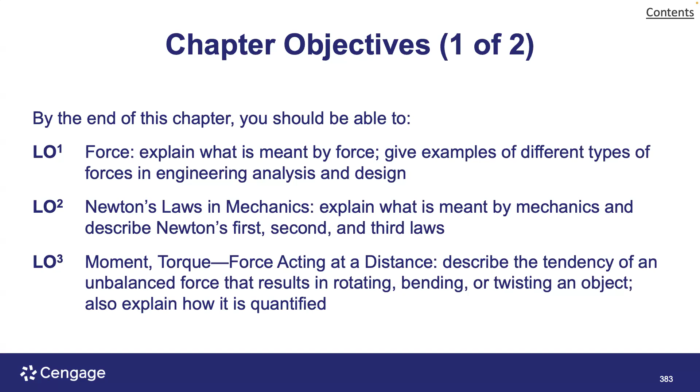Once again, here we see this term again - force acting over a distance. This is in terms of work. For some of you that have a long drive, you could say force over distance - you have to drive 50 miles, that's a lot of force that has to take place. For most of you it's probably using gasoline; some of you it might be an EV car, so it's electrical energy, kilowatt hours that are stored and converted into force, acting over a certain distance, maintaining whatever it's needed to go that distance. Starting from zero to get an object moving is going to take more force.

So this describes the tendency of an unbalanced force that results in moving an object through a distance, and it also explains how it is calculated.

When we have pressure and stress, that's force acting over an area - you can think of a balloon, a blow-up balloon. One of two things is going to happen: if it's made out of rubber, it's going to get bigger the more you blow air into it. But if it was somehow constrained, the pressure would build up in that fixed area and get higher and higher. Your tires on your car, you get them up to so many PSI - that's an example of pressure.

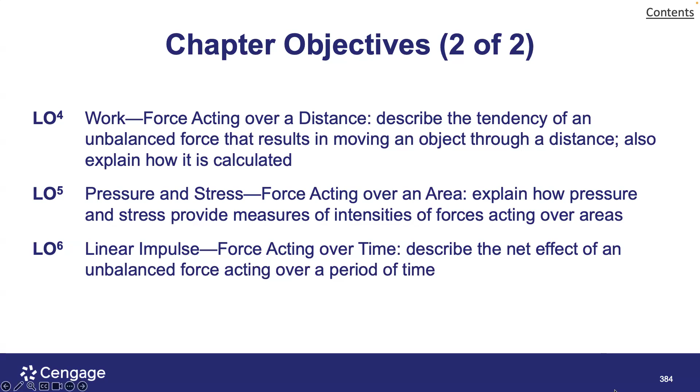Maybe you've seen handbells - I'll just think of a musical example. They ring a bell, and based on the acoustics and the way it's set up, it's going to resonate for a while and you get that sound going over time, responding as it's vibrating. That vibration slowly goes less and less, but those are tuned just like a tuning fork - you ping it on the table and it's going to sound a note, and it just gets fainter and fainter over time. Or you can have an impulse response from a couple other sources, but that's just to give you a general sense of what that is.

So the simplest form of force that represents the interaction of two objects is a push or a pull. If you've ever played tug of war, you could be thinking of that - whatever team has the stronger folks is likely going to get the other folks to go in their direction.

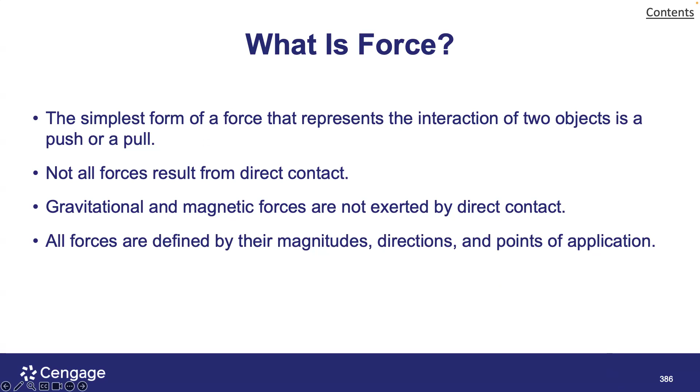So there's a variety of different forces - there's gravitational force, magnetic forces. Those are all things that are there as well, so we get a chance to think about those here. We talked about units of force, SI units, previously, so I won't get into that.

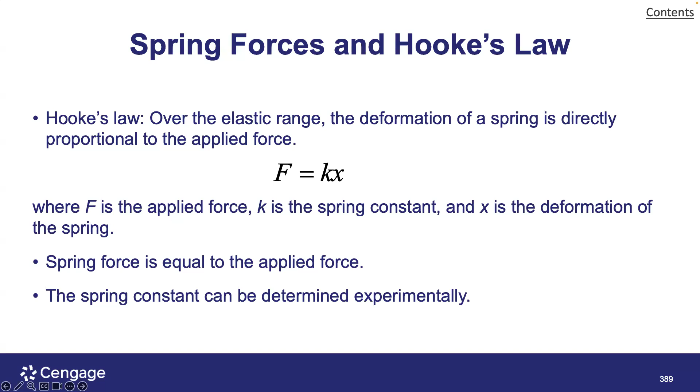You have spring forces - you can put pressure on a spring and then release it, and that force is going to go out. So this is an equation for that. If you have a garage door opener - my wife and I, our garage door has these great big springs that keep the garage door open - that gives you an idea of the kind of force it can manage to keep the garage door open and then have it nicely close without too violently going down when you want it.

So then we have Newton's laws of mechanics. Mechanics deals with the study of behavior of objects or structural members when subjected to forces.

Kinematics, kinematic equations, maybe you've heard of that if you've been taking some physics courses. The behavior of objects and their linear and angular displacement, velocity, acceleration, deformation, and stress. An object is defined by its geometric characteristics and material properties.

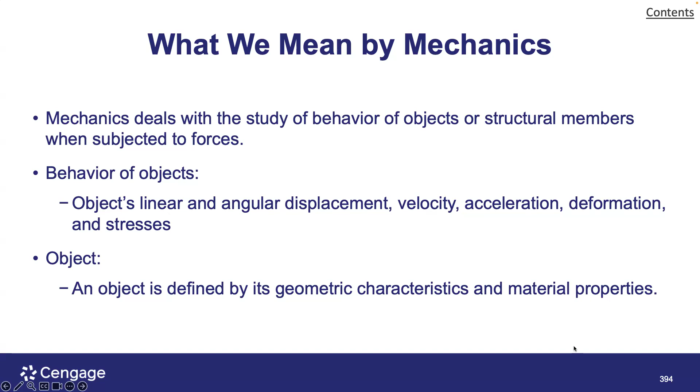So here's Newton's three laws. Newton's first law: whatever is at rest stays at rest, and whatever is in motion tends to stay in motion. That's a longer way of saying it, but I won't give that to you, you can read that.

The second law of motion is F equals ma, that's the mathematical form, and the net effect of unbalanced force is equal to mass times acceleration, or F equals ma.

Newton's third law is every action there exists an equal and opposite reaction. So if I'm pushing against the wall, it's pushing against me at the same level if we're staying in a balanced situation. If I wanted to start to move away from the wall, I have to have a force greater than what is pushing in the other direction. So those are pretty common things that I think you've all heard about.

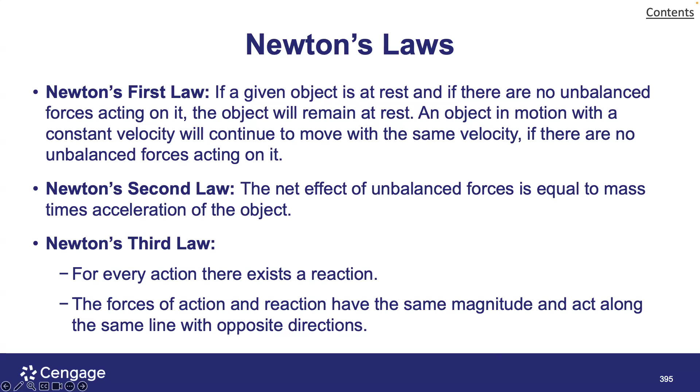We have moment and torque. In this first example of force acting at a distance, I mentioned a torque wrench as a way of thinking about that.

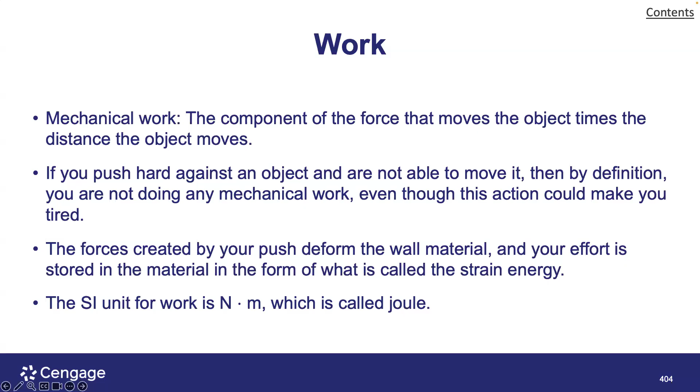Here we have the concept of work. So it takes work to get your car to move from home to school, to give you an idea. That's another area that we're getting a chance to explore.

Pressure, talking about volumes, compressing gases into the same volume. That's what we get a chance to be also thinking about. That's part of this, and it also gets into weather systems.

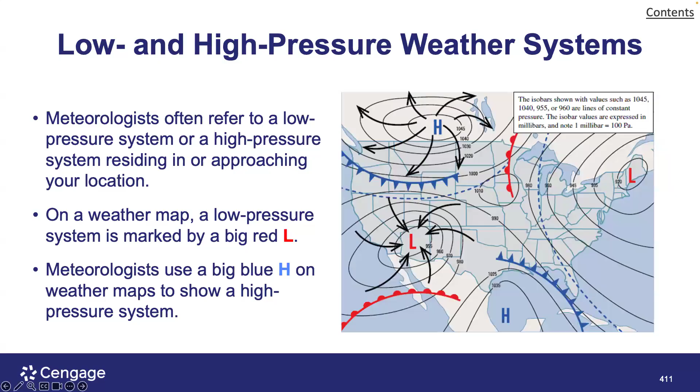And then finally, linear impulse, an impulse response. Maybe some of you have heard that term, maybe more of the engineers. If you haven't heard it, it's probably something you'll hear about in the future. You have some kind of a step function that you apply to something in your physics course. It's likely you'll have something where you impart a large force, and then you see how it acts over time.

We're just finishing up baseball season. So basically when a batter hits the baseball, this gets into a two-dimensional kinematic equation. You hit it, and if you know the velocity and the angle, you can calculate how far that ball is going to go. So that's what they do. They tell you the exit velocity and the angle, and they come up with these predictions. Even though they don't have somebody catching the ball right when it would land, they can give you that estimation with all the other information that they know to do that.

Force is an extremely important thing we think about in engineering and programming related activities. In engineering, it's quite clear - why do we have technology? Why do we have cars? It creates the ability to do things with less energy. It's a lot less energy to just put your foot on the accelerator pedal versus having to run, walk, or ride your bike from point A to point B. All of those are rationales for where we're using force to better our lifestyle.

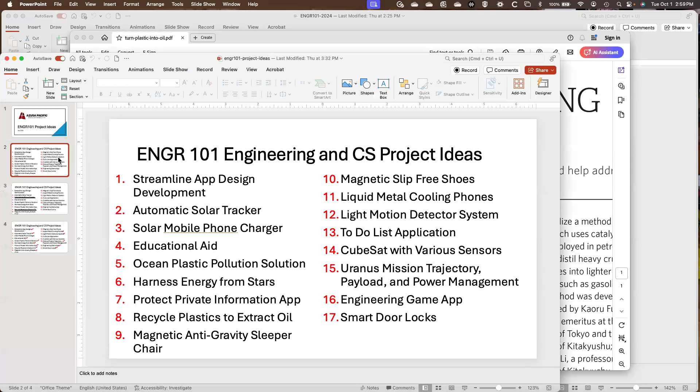Okay, well let's pull up our project list, and then I'll work more specifically on an individual one here to start out with. So here's our project list, and as of our last meeting we had a couple of volunteers of ones that wanted us to focus on your projects.

So the first one we had was recycle plastics to extract oil, and the second one was a solar mobile phone charger. I put announcements with some information that I found. The first one was an article I found of a technology that was advertised, and I'll go to that next.

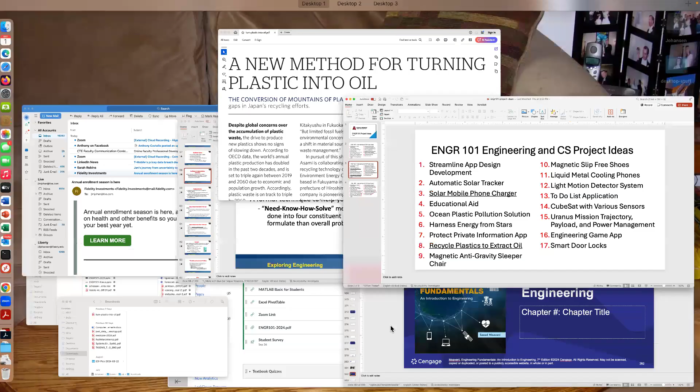So we already had a little bit of discussion about the first one, which is the need. What is the need? What is a problem statement that we're trying to focus on for this particular application? There's a shortage of oil—this is one of the ways we could start to fill that gap. There's also the imperative of trying to clean up the environment. If you can make a cost-effective way with a return on investment to clean up the excess plastic that's all over the place, this could be a helpful thing we could be doing. So that would be the first step.

Anything you want to add to that, in that project, or does anyone else have a comment on that? Yeah, you're right when you say it's a method, I guess, of closing that gap. It's a method to close the gap.

Well, this is a place we can practice. So it's a method that's used to help combat the low reserve on fuel, because fossil fuels are running really low right now and we're still depending on them. So that can help while also being environmentally friendly and helping combat pollution.

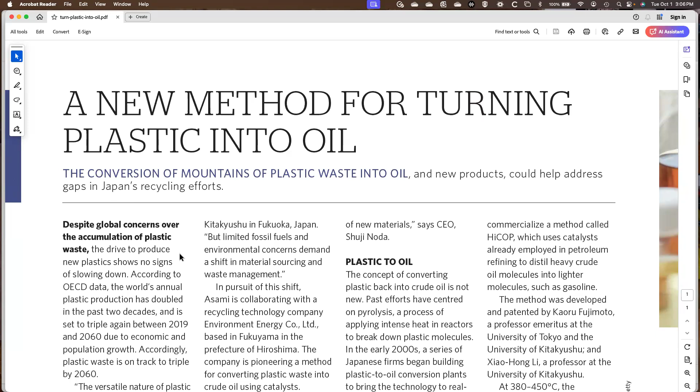The title was 'A new method for turning plastic into oil: the conversion of mountains of plastic waste into oil and new products could help address gaps.' This is referring to Japan's recycling efforts. I think Europe and other places like Japan have limited locations for landfills, so recycling can be more of an imperative just because of geography. But we want to get away from having all this plastic, or having it in the ocean - this is trying to give us some perspective about that.

So despite global concerns over the accumulation of plastic waste, the drive to produce new plastic shows no signs of slowing down. According to OECD data, the world's annual plastic production has doubled in the last two decades.

The versatility of plastic—its lightweight nature, durability, and ease of molding—is hard to rival with any material now or in the foreseeable future. So this is something that is a concern.

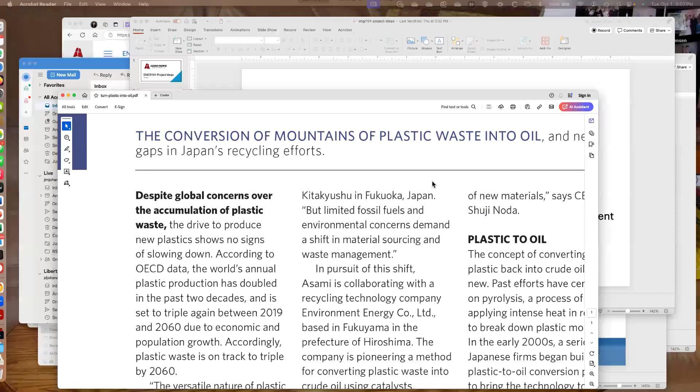Here we have Asami, a professor at a university in Fukuoka, Japan. Limited fossil fuels and environmental concerns demand a shift in materials sourcing and waste management. That's exactly what we were talking about earlier, related back to our need statement. They've got it pretty well articulated.

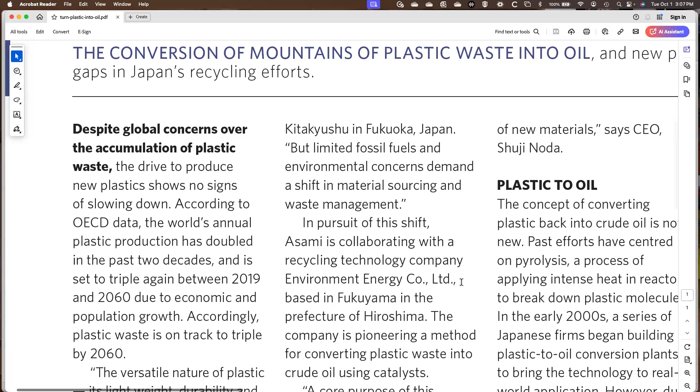Now if we're doing our independent study, we need to be leveraging what we have. So Asami is collaborating with a recycling technology company, Environment Energy Company Ltd, based in Fukuyama in the greater Hiroshima area. The company is pioneering a method for converting plastic waste into crude oil using a catalyst.

It's not just using heat, it's also using a chemical reaction to facilitate that process. You can read through this.

The concept of converting plastic back into crude oil is not new. Let's think about that. Crude oil has been made into a lot of different hydrocarbons, and one of those is plastics of various types—nylon and others—different hydrocarbon ways of creating long molecules.

Past efforts have centered on applying intense heat in reactors to break down plastic molecules, which does work. A series of Japanese firms began building plastic-to-oil conversion plants to bring the technology to real world application. However, due to fires, industrial accidents, and economic problems, these plants were forced to close.

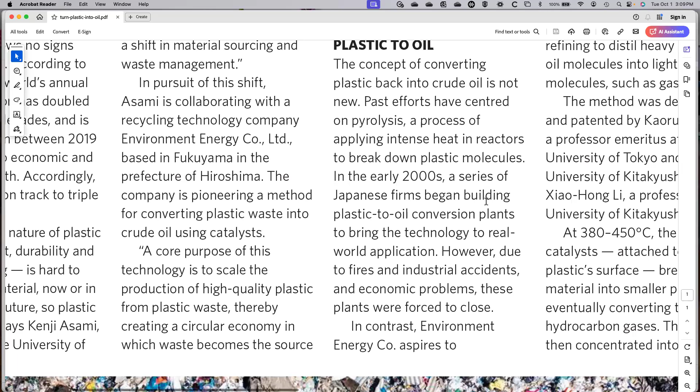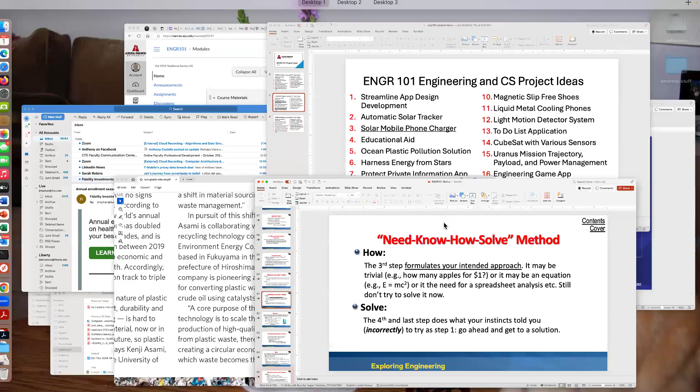So we didn't have a viable option. We don't get into it too much here, but it comes up a bit with the spreadsheet—you can look at analysis of alternatives, a concept I'll come back to later, which is deciding which option we should use. This gives us a chance to think about a particular option.

So the name of what they called it—they call it HiCOP. A nice little name, which uses catalysts already employed in petroleum refining to distill heavy crude oil molecules into lighter molecules such as gasoline. So heat, but not intense heat, plus a catalyst can lead to gasoline.

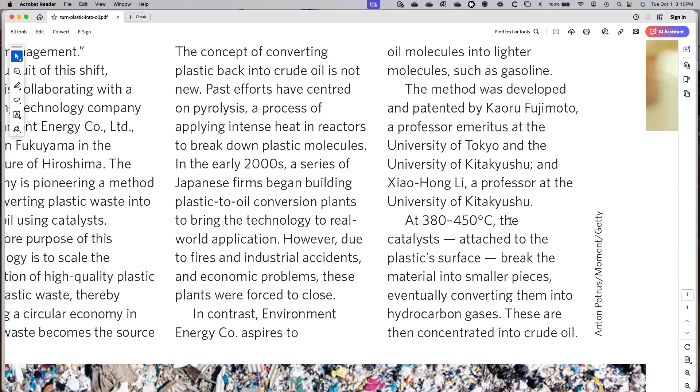It was developed and patented by Kaoru Fujimoto, and now they have this realized. At 380 to 450 degrees Celsius, the catalyst attached to the plastic surface breaks the materials into smaller pieces, eventually converting them into hydrocarbon gases. These are then concentrated into crude oil. That's just a little synopsis of that.

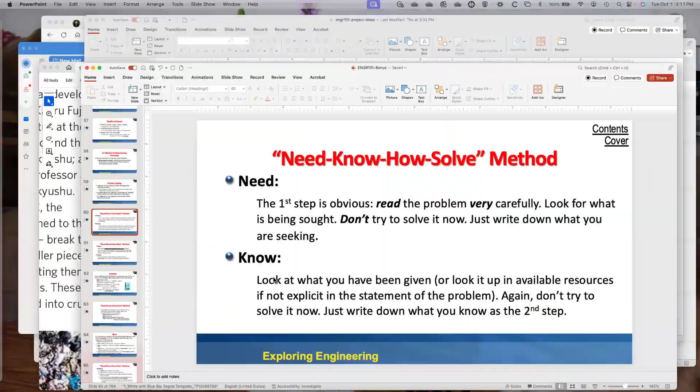Let's look at it. Let's pretend we've got our statement here. We've gotten the how, we've gotten the need, we're figuring out some of the things in terms of the know. So now we've done some research, and here's an example of one of the resources and one of the technologies we would like to leverage. What do we do now?

You want to talk about that? And then others, feel free to inject. So we have this process, which is a shorter version of what we have in our textbook.

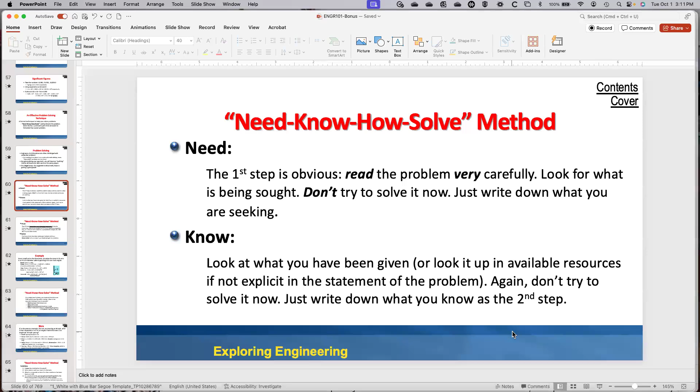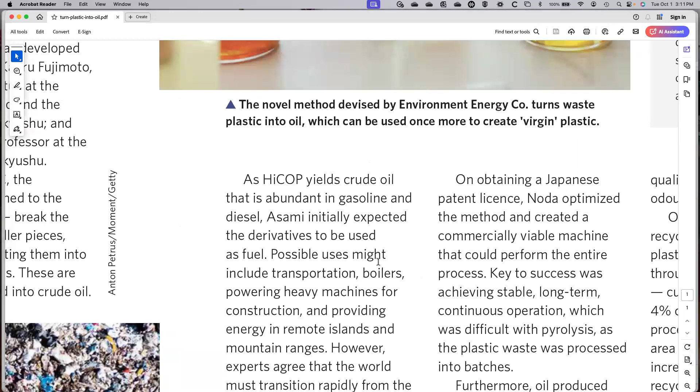Need, know, solve, how—this insurmountable problem of turning plastics into oil. We've seen an existence proof that's out there. Now we see two options available: one is just applying heat, another is applying heat with a catalyst. What do we do? Are we going to propose another option, or are we going to just continue surveying to gather more information?

For some of you, this is where your research project might go—you may just want this to be a research project because you don't know much about it. So it may just be coming up with a list of criteria for which might be the best option, and that's as far as you go.

Others may go further and say, no, I want to actually go with this one particular approach and do some analysis—using MATLAB, Python, whatever you want—for data exploration of different things out there, maybe from a more software engineering or computer science point of view, trying to get some data analytics and metrics. Those are all possible. Does that help?

So what do you think you would want to do? As of now it's not holding you to it, but I'm just having you think about it—what would we do with your project related to this new information?

Survey, research, both possibilities - how does it differ from just using surveys, and what kind of approach would that be?

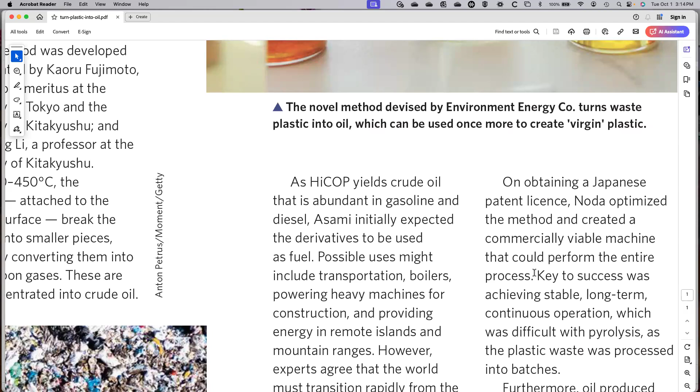But that would just be branching out to another thing, which is perfectly fine - that's both good news and bad news. You can come up with more options instead of getting narrower, you're getting wider. But that's still true, and you may end up having to refine your research question with that. Still, catalog everything you find as you're doing your research and refining your needs.

So I think that sounds like a good approach. General thanks to everybody.

Doing some searches, you can go to the library website and do a search within that, or go to Google Scholar. You want to find scholarly, peer-reviewed journal articles that give you information, and another important part is they give you references, so you can see who they're quoting. That can give you a good basis for figuring out what's actually been done at a scholarly level.

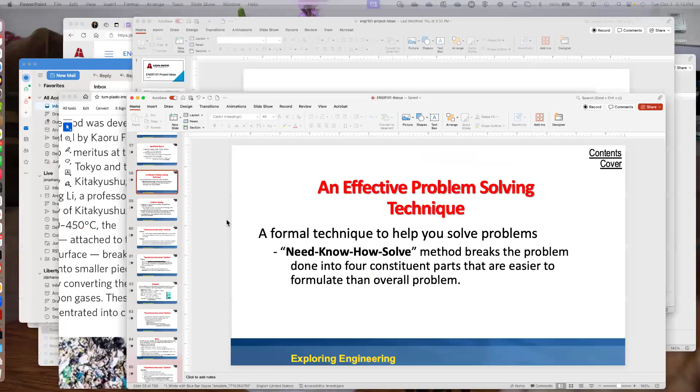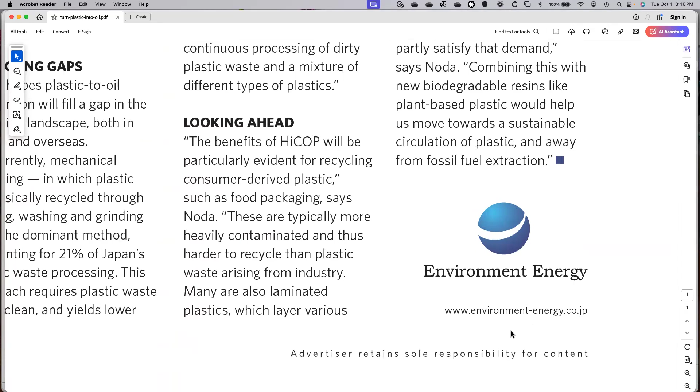This one article, I think it's accessible and good, but if it's an advertisement, that's probably not what you want. It also doesn't have any footnotes, which is unfortunate - just a couple things I can point out. But this does give a reference here for Environment Energy in Japan, so we're getting a chance to see some of the things they're thinking about. It's still a good article for us to look at, and it shares some forms of technology we could be leveraging.

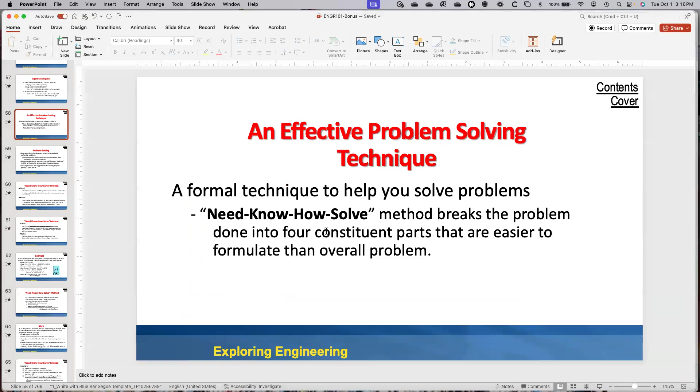Any other thoughts? So we've got the first couple of steps, you can do a bit more research. The third step is thinking about your methodology and how you're going to actually do something with all this information - formulate your intended approach. That can be part of what you put into your report.

Let's go over to Canvas for a minute. I put all this extra information in here. Does this get bigger when I do that? Okay.

Here's the first part, where you want to be defining what you're going to be doing: define a research question, state a hypothesis, develop a research methodology, collect information, analyze the gathered information. That's related to this first step, the need.

Here is the design and computing process from our main textbook: recognize the need - same word, the need - problem definition, research and preparation, then conceptualize, which gets into the how, coming up with a synthesis of what you've created as you figure out the results, an evaluation of which is better, any optimization that might be required, and finally the ability to present the results.

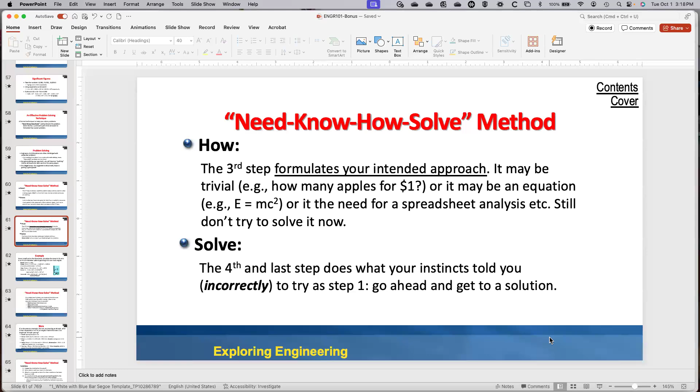Okay, the other one we had here was a solar mobile phone charger. Let's have a little discussion about that - please remind me, whose project was that? Trying to...

Okay, well then we'll just have to defer that. But one of the things that I did is I was looking at solar chargers, and there are a variety of those that are commercially available. So from that point of view, it's something that can be done.

I'll just throw in number 2, an automatic solar tracker. What if we wanted to have it a little bit more higher performing? It's just not flat on the ground. Anybody have solar panels, your family, or you've seen solar panels? What happens is the angle of the sun hitting those solar panels, when it's at a grazing angle, it's not producing much electricity, but when it's straight down, that's when it's getting the most electricity. So if you were to track that, you can actually increase the amount of solar energy you're producing from those panels.

And that's the motivation for having that tracker. So it could actually make this mobile charger perform better, if the cost is such that the tracker isn't going to make that charger like a thousand times more expensive. So those are the cost trades that you would be thinking as an engineer, computer scientist, or software engineer. All of those things come up in each one of those points of view. That's a little bit of a thought on that.